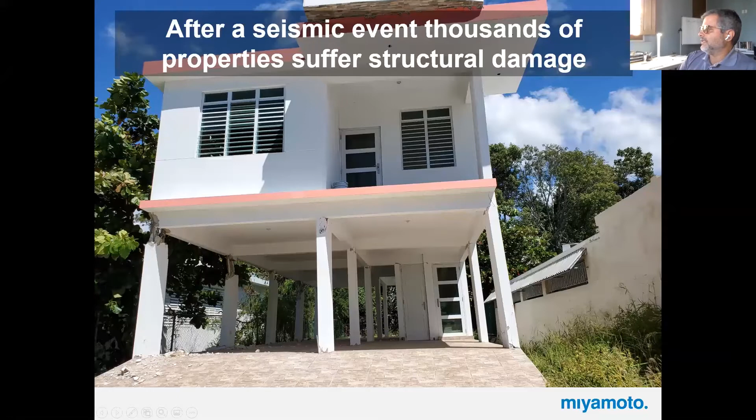So as you can imagine, all around the island, thousands of properties were affected, and people were left on their own to do their FEMA claims. Remember, most of these people have no idea what they're doing, and they get this check in the mail and are told, figure it out, send us a report.

That home, actually, that's one of the sad stories. That home we have there, Kit and I made the presentation all over the place that cases like this could be saved, and it was more cost efficient to save the home, repair it, make it more resilient than demolition. But sadly, last week I saw a video of that same house being demolished.

The efforts in the municipalities were the initial response to the disaster. Kit made an article about it. It was really efficient, people would move fast, campsites were set up, people were helped. But once that initial effort to respond to the disaster ended, they packed the bags and left everybody on their own. There was very little support, and that's a sad thing.

I mean, we made a constant effort to try to save homes and tell people what's the best way to do it. But like always, demolition money is the first one that goes to town, and they want to demolish. So that's a side note on that. Again, these people don't know what they want, what could be done. The only resource they have is support from FEMA, but the technical aspects of their claim were left to them with the $500 check. So it was a real situation.

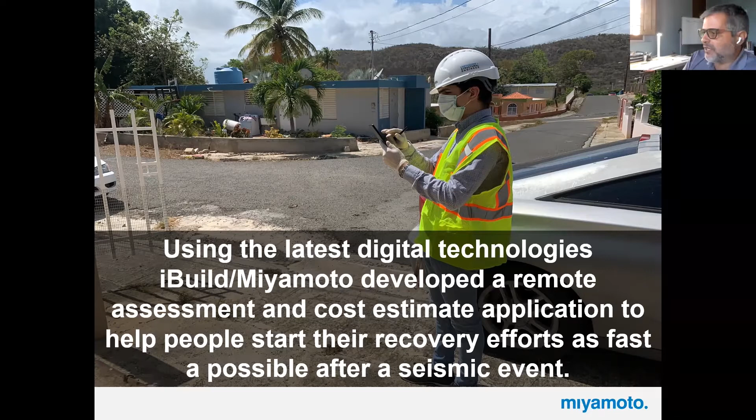And this is exactly our first visit using iBuild, once we got it going on site. One thing the SAC also put together was a way to book it online. Here in Puerto Rico, booking online wasn't that effective.

I think this is really useful, probably for considering what things we need in the future if something like this happens in the States. I think this tool will be really useful in the States, especially now after COVID when everybody does things online. But here people use their phone, so they call us to do appointments and make payments on the phone, which is very popular here.

So basically, how does this work? How does the app work? Well, we get Android tablets, go to the property, and do an ATC 20 of the property, doing the repair estimate right there on site.

The application was really user friendly the way iBuild worked it out. It was really intuitive. We gave them the steps that we needed, and we'll go a little bit in depth into that, not too much. But as you see, it's very graphical. It was very easy for us to train our interns for what they need to do in the field.

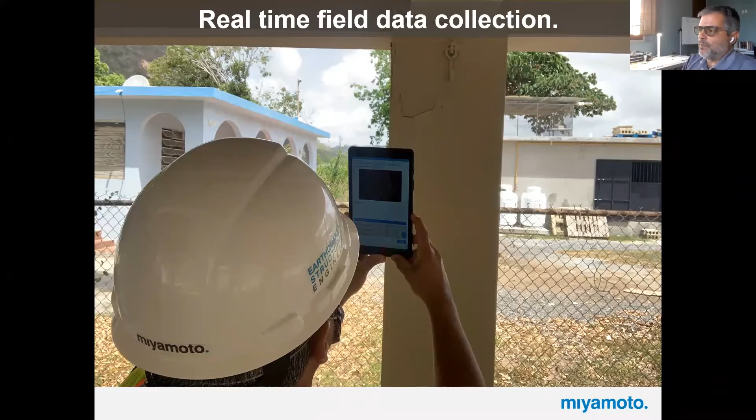These are part of the ATC forms, the standard forms. They're digitalized, so we just fill in the blanks of an ATC evaluation form. Very straightforward approach. The real-time data collection was really nice because once you identify, for example, that crack there, we document the size of the damage and take a picture. It's tagged on location, so we can go back and reference where it's at on the plan view. This is the nice feature of it.

The way we work it out is once we fill out the ATC 20 form, it goes into a drawing mode where you draw the plan view, like a sketch of the plan, and then you pick your predefined damage. We identified the typical damage we were going to see, and you see the small icons that show where different damage is located. When you touch one of those spots on the application, it jumps into the specifics and the photo of the damage.

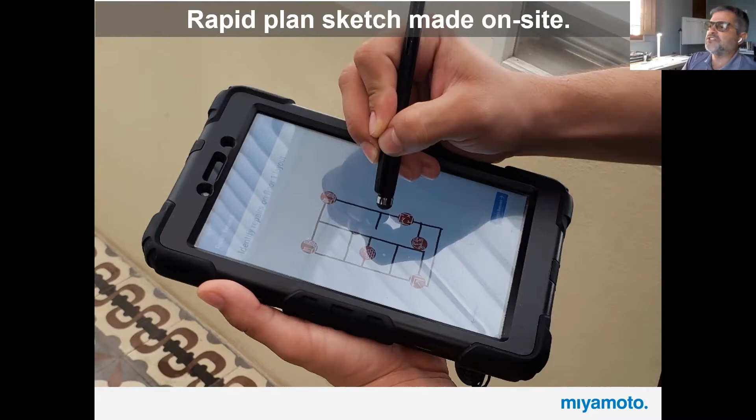We're going to go quickly through a typical process. Basically you create a new project on the main page, then it takes you to the place where you do the sketch. Nothing fancy, just to familiarize yourself with where the damages are located.

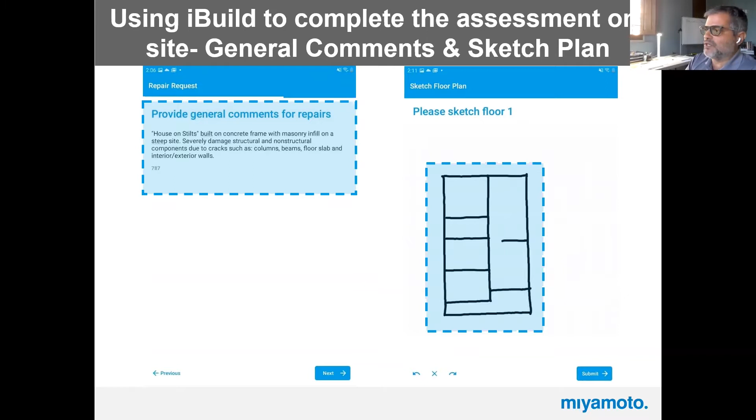Again, this is really nice. You pick the damage, put the spot where it's at, and what Kit and I worked on, we developed sketches of the type of repair needed there, taking the dimensions of the existing column or whatever. Then on the bottom, once you enter the data—existing column height, width, whatever—it takes that data in spreadsheet format that we also have, and calculates a takeoff on the estimated cost of everything involved to do that specific repair. It puts the cost right there; for example, that column jacket was like $2,000 or something like that.

That process repeats itself throughout the floor plan. Every time you touch one of them, you get the estimated cost of that repair and a picture with the location. They just keep going at it in the field, filling out the information on all the different types of repairs we identified.

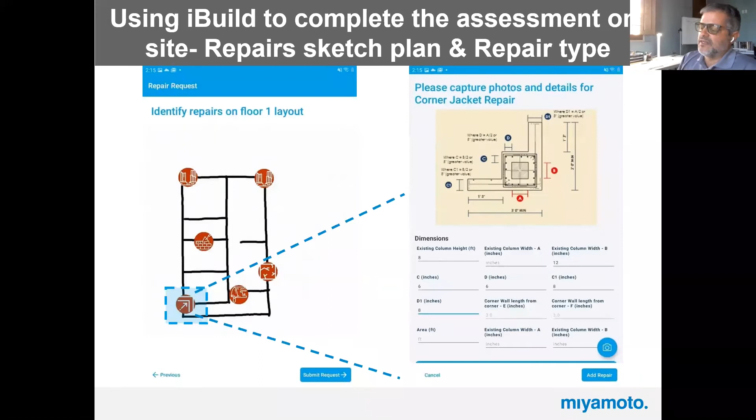One thing Kit told us to do, since these were repairs, is we included—you see, this is not your typical column repair—we put in column jackets and corner jackets to make the repair better than just some crack repair, so it results in something better than what they're going to fix. So you can say we included improvements as a default in our repair recommendations for the owners. Again, every single one is very itemized, and this helped us out a lot with FEMA claims. We had very good feedback with FEMA, since locally there had been problems with repairs not caring for any damage that wasn't structural.

People were submitting all types of damage—tile damage, paint, and so on—and their claims were immediately disqualified. Since our format was strictly structural related, we included paint, but only paint related to the repair of structural damage. So the whole amount of what we told them was their claim would get approved, versus other companies submitting complete assessments that weren't what was being looked for, which got rejected or got no money. Very quickly the word got around that we were very effective at getting the claims.

What happened during COVID is that we were remote. So we had a crew of interns trained on what to look for and what to account for as repairs. During the site visit, we would log in with them and talk to them, looking at the cracks or areas where they had doubts or weren't sure how to record things.

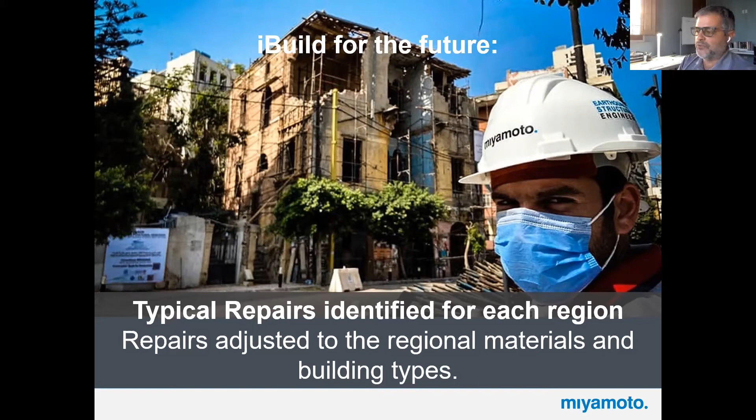I think that's Carl, right? We took his pictures as a transition to him. Basically, each region has its own characteristics, and we know the typical type of failure we get once you go out there. They're very repetitive, so each area can identify their type of repair, the type of damage they can expect, and have the software ready to go and ready to use. I emphasize this a lot, because if it happens tomorrow in some other place, like it happened to Carl, he's not at a point where he can just pick it up and go. I think that's something we need to look into, to take it to the point where different markets can, in case of an emergency, have the tool available and ready to go, just update the price, and get everybody out in the field.

I think having that offline availability is pretty critical, like you mentioned, because during a disaster, there's a good chance you're not going to have internet.

No, for various reasons. The only logistical challenge will be getting the GPS location for the site. When you don't get the GPS location on site, we'll probably Google it when we go back to the office and put it in by hand. Although, that GPS doesn't really require internet, I don't believe. It's satellite controlled. Yeah, but once you don't have internet, you cannot get the GPS location into iBuild.

You could get it through your phone. I got it, okay. But the iBuild application couldn't process it - I mean, it won't work. Got it, zero. And that's an improvement we definitely need, because the part of the cost and the estimate, that's all just spreadsheets.

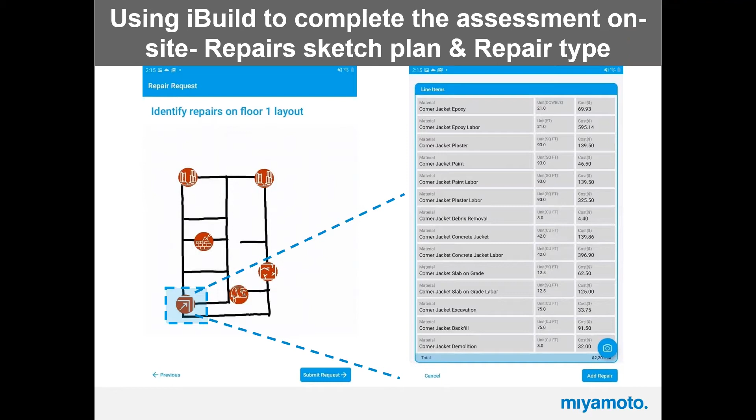Yeah, got it. Similar in Haiti. Yeah, I don't think you can pre-program this for every country, because every country or every region has different archetypes, put this way. Yeah, that's kind of where I was going.

My question will be, like a place in California, your typical home construction is pretty typical - the house and the damage will be the same type of damage as here. Remember, we did not use the tool for historic or older buildings. We used this for typical houses. If you call us out to a historic district, an unreinforced masonry house, we will not use the tool. This was for the typical house in Puerto Rico. Everything outside that scope will be typical services, and of course we'll have to charge more and do a different approach. But this will cover about 90% of the housing construction market on the island.

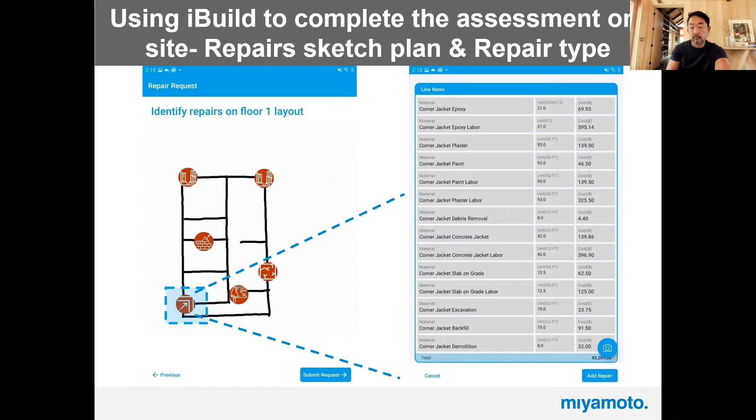Sorry guys, so I'm going to talk about Beirut a bit and the blast. There's going to be a lot of information, so I'm going to go through this kind of quickly. Do you see the full screen? Okay, cool, I'm going to start with the image of the blast.

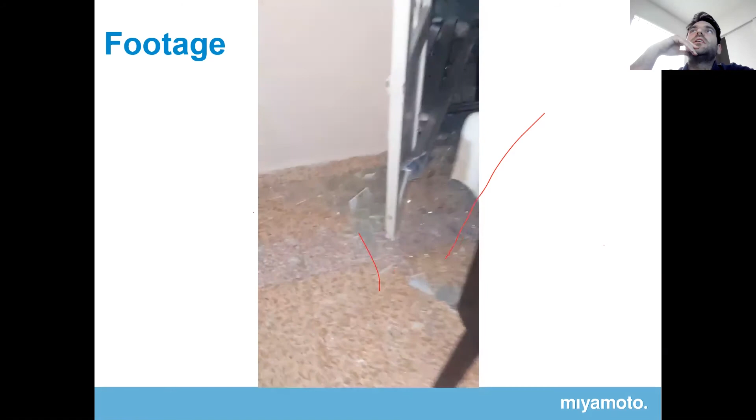It just shows doors being flown into the houses. We took these videos - kids could have been playing here. This is an aluminium facade that was behind this door, so you can see the amount of damage. This all happens instantly, so you don't have a chance. It's not like an earthquake where you can duck and cover - it just all happened instantly, and if you're caught in it, you're in trouble. So it showed the damage to the facade, which was really big.

So let me just wait a bit for the next one.

Besides that, the phone lines were basically full, so when you try to call someone, you cannot get reception because everyone's calling.

But it just shows you the scale of the damage.

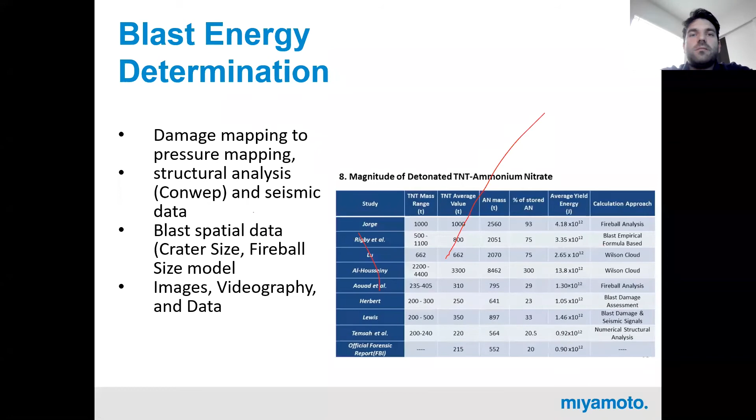So I'm gonna jump into the next slide, and we're gonna talk about the blast energy and how they determined what the energy of the blast was. There was 2,750 tons of ammonium nitrate, which is equivalent to 1,000 tons of TNT. They did multiple studies to determine the actual value of the blast, and the agreement is that it's around 300 tons of TNT equivalent - some studies are way off, but the agreement is around 300 tons. So we're talking about 30% of the ammonium nitrate. Had all of it exploded, I think it would have been a much uglier scene.

So a few ways they determined the level of the blast: first, by looking at the level of damage. For example, you can look at windows, glass broken - okay, this maybe is 0.22 psi. Using these, you can basically map out, based on the damages, the pressures that were present at the time of the blast.

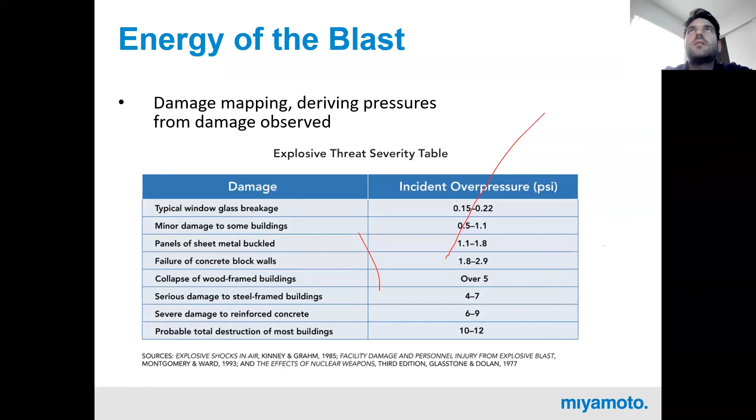Other methods were using structural analysis - they used Conwep software, modeled the blast at a few timestamps, maybe a 1,000-ton blast, 800, 600 tons, and then looked at the silos that were holding the grains, and looked at the closest damage you would have gotten depending on each blast. They found that the closest damage was due to a 220-ton blast. So that's from a structural standpoint what we can do.

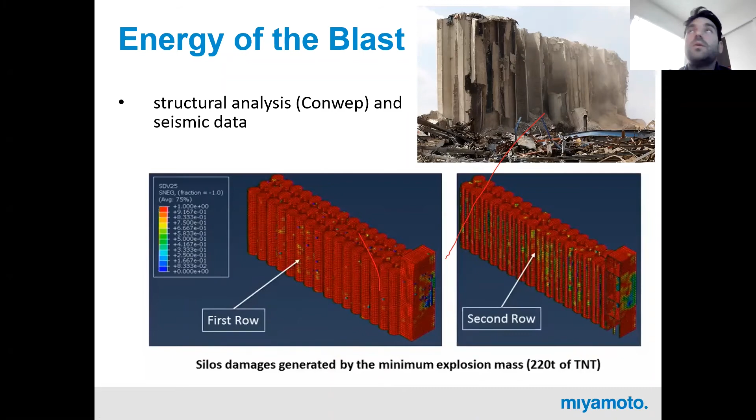They also used something called the fireball size model to estimate the blast - depending on how big the fireball evolves with time, you can estimate the blast, how many tons it's worth. And then they used a lot of videography and data to basically estimate what was in the hangar.

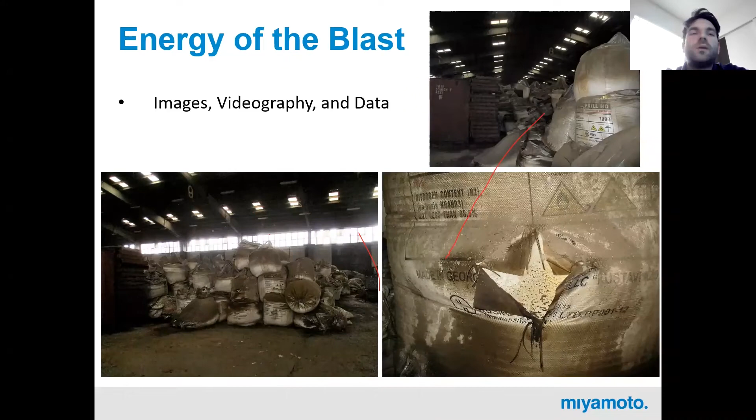So that's the famous ammonium nitrate, and you can see how it was stored haphazardly, and how contaminated it is. Ammonium nitrate is not really toxic, and it doesn't really explode, but when you contaminate it and put it under pressure, then it becomes explosive, and that's exactly what happened.

So what was in the hangar? 2750 tons of ammonium nitrate, 23 tons of fireworks, 50 tons of ammonium sulfate, tea and coffee, detonating cord, car tires. All of these make it very easy to contaminate the ammonium nitrate.

So they welded one of the doors shut. I think they were afraid of it being stolen, and it kind of started the entire fire, which I think lasted for maybe 15 minutes before the blast.

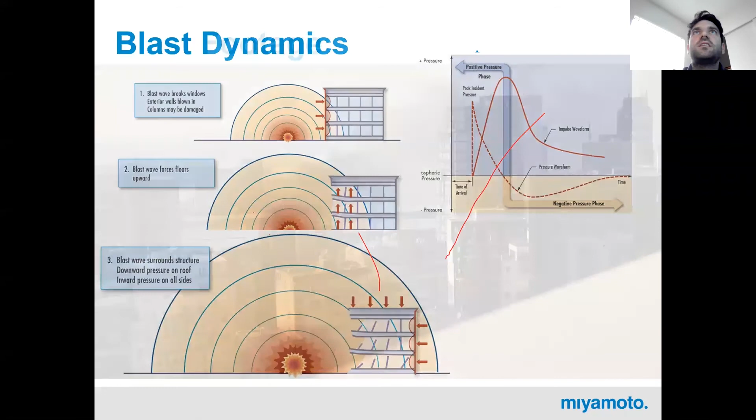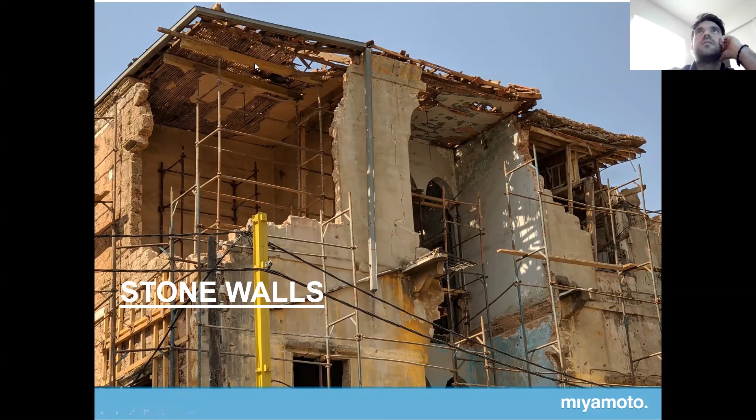So this one didn't collapse because it was light, wood light frame. Some of them, when you look at this photo, and I don't tell you it's a blast, you might think that's an earthquake. These look like cracks emanating from an earthquake, but these are actually yield lines. So this is out of plane failure of the wall - if you look at yield line failure on a slab, that's exactly what this looks like.

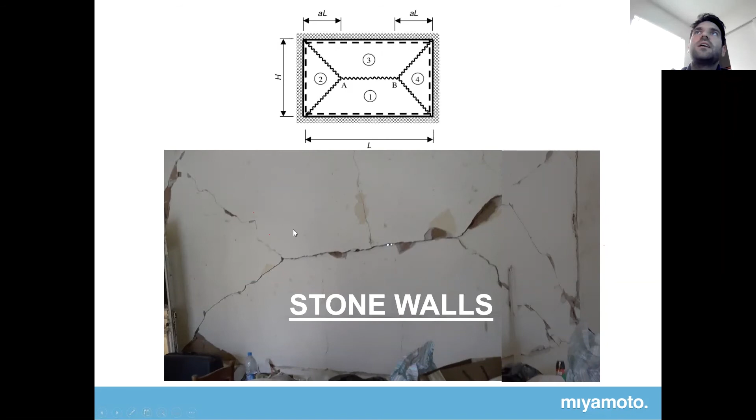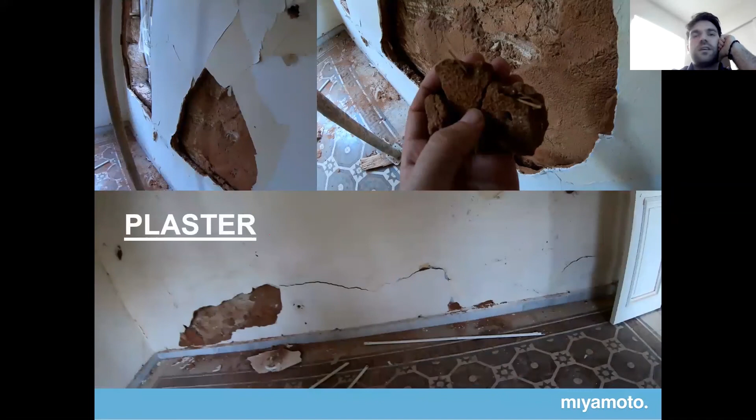Plaster - a lot of the plaster got pulled out of the walls because when the blast comes in, it just pulls it off. And the plaster was often thick, like maybe 2 inches, sometimes 3 inches thick, very thick plaster with wood fiber reinforcing. And these are for cultural buildings, which saw most of the damage.

Wooden roofs got damaged, a lot of wooden roofs, because they're so light. More of the wooden roof damage.